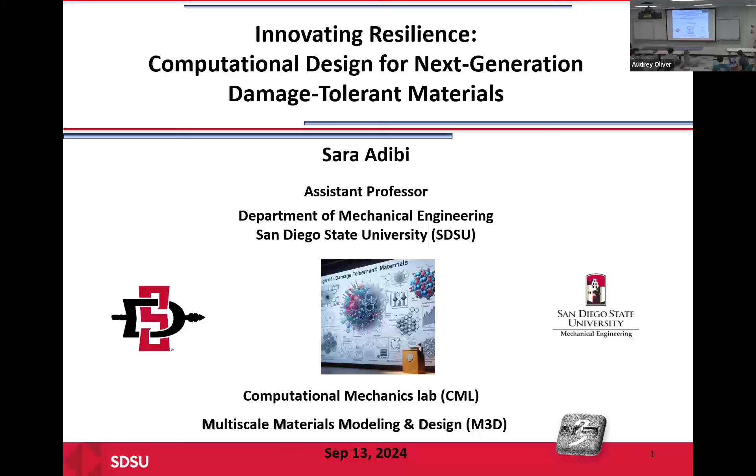I'm going to talk today about some of my research in the computational mechanics lab, in the area of multi-scale material modeling and design. Specifically, I'm going to talk about computational design for the next generation of damage-tolerant materials.

He has already introduced me, but just as a slide, I did my bachelor's and master's in Isfahan University of Technology in my home country, and I received a scholarship and moved to Singapore, where I did my PhD at National University of Singapore in collaboration with the Institute of High Performance Computing.

Then I moved to the US, and did my first postdoc at University of Houston in the Department of Civil Engineering. Then I moved to UT San Antonio, where I did my second postdoc in the Center for Non-Equilibrium Phenomena, and from there our group moved to University of Texas at Austin, and from there to Texas A&M University. I was in 3 places in Texas.

After that, I got a research faculty position and moved to the Center for Advanced Vehicular Systems at a very small city named Starkville at Mississippi State University. After that, I moved to San Diego 2 years ago, and right now I'm an assistant professor in the Mechanical Engineering Department at San Diego State University.

As I've told you, my research is mostly in computational mechanics. Let's see how computational mechanics has changed engineering design over the century.

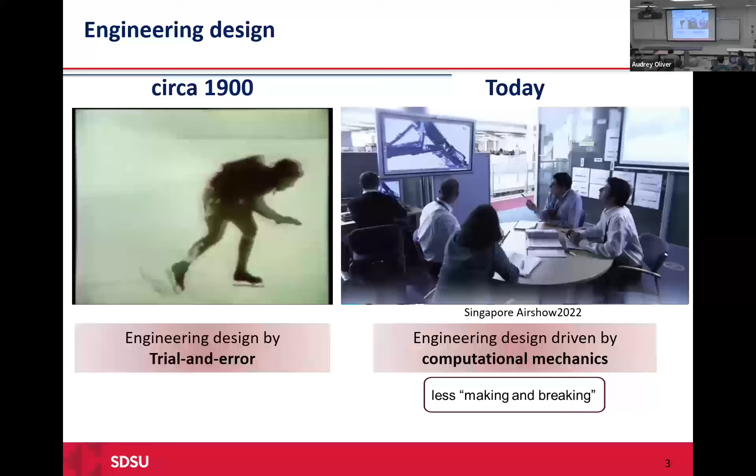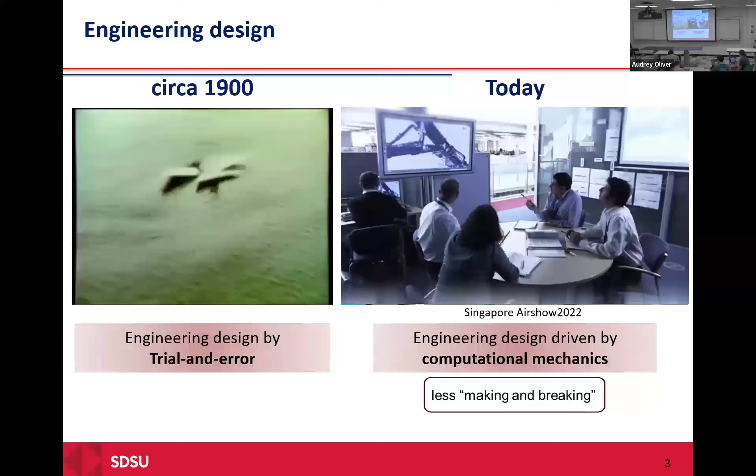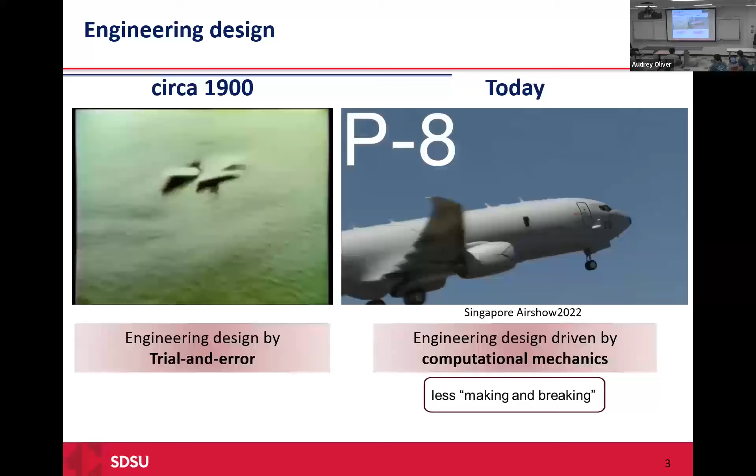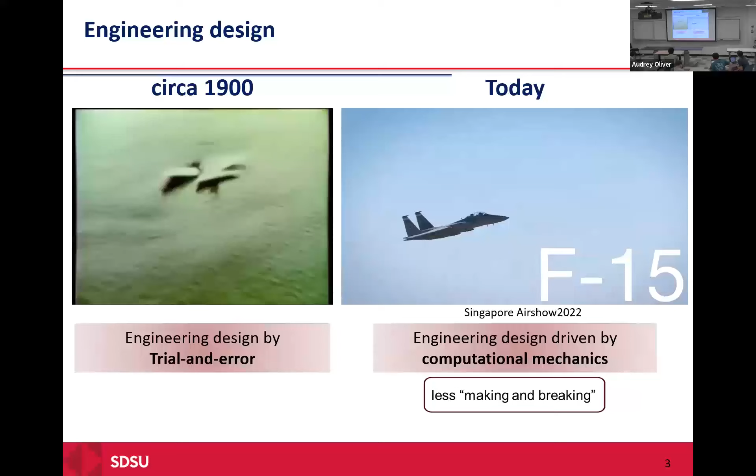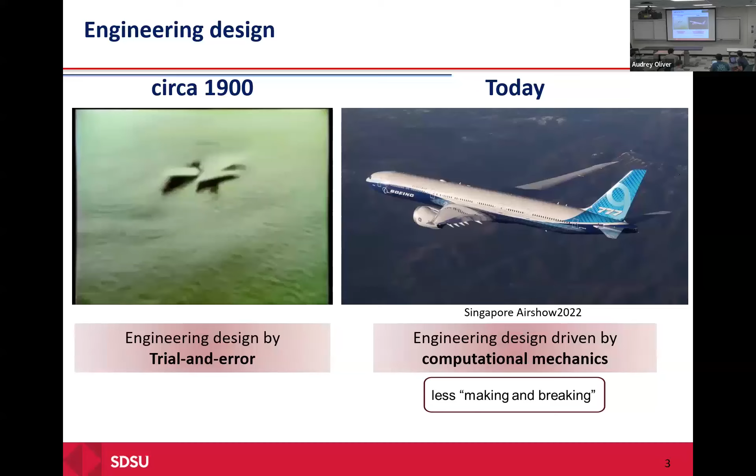This is just to show you how computational mechanics can revolutionize the area of engineering design. Hopefully in the future, computational power, data science, and machine learning can help us design and optimize through all the relevant lengths and time scales, and come up with multi-scale models that are more robust and higher fidelity. Advances in manufacturing and material processing can also help us in different sectors with new materials that may pave the way for zero carbon emission by 2050, which is the aim, especially for California.

Most of these computational mechanics applications are used especially in areas with extreme conditions. Extreme condition is something I'm mostly dealing with, it's one of the grand challenges for engineering explained by the National Academy of Engineering. They are applied in different sectors, for example renewable energy, aerospace, defense, and also advanced manufacturing or even medicine.

In all these sectors, usually we are dealing with an extreme environment, which can involve challenging experiments or complex physics that comes from high pressure, high temperature, or very high strain rate loading. It's difficult to do those experiments, and computational mechanics can be of great help.

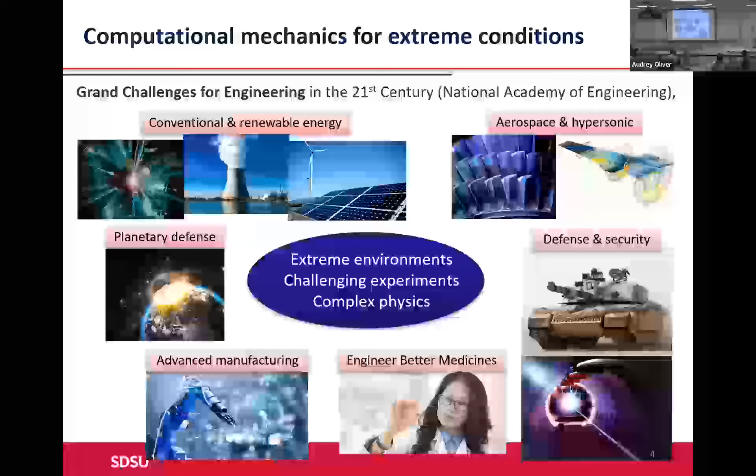My research interest is mostly in data-driven and physics-based multi-scale material modeling. Basically, I'm trying to model material behavior and come up with design, discovery, or processing of newer advanced materials—for example, designing materials that can be damage tolerant.

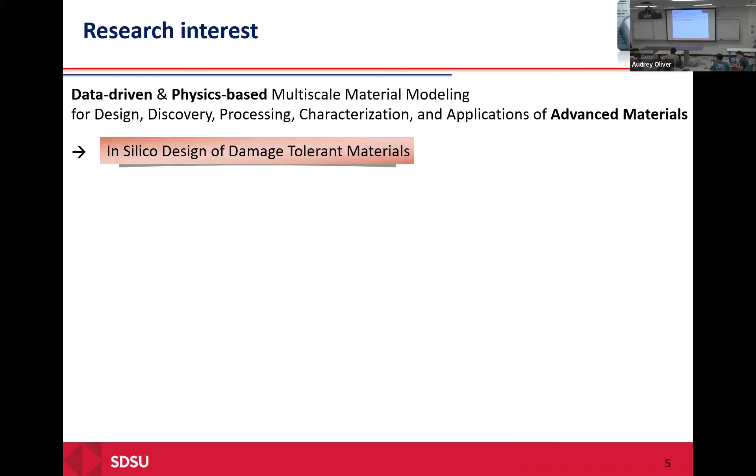This initiative comes from the Materials Genome Initiative, which was launched about a decade ago. The aim behind it is to come up with discovery and deployment or manufacturing of materials with faster speed and cheaper cost, which can be used in different sectors like clean energy, human welfare, and national security—helping to improve the quality of life.

To summarize, for any multi-scale material modeling in these sectors and applications I've discussed, we are dealing with different time scales. We can get data and models from these different time and length scales, and come up with a multi-scale model that can predict material behavior or design a material with desired properties.

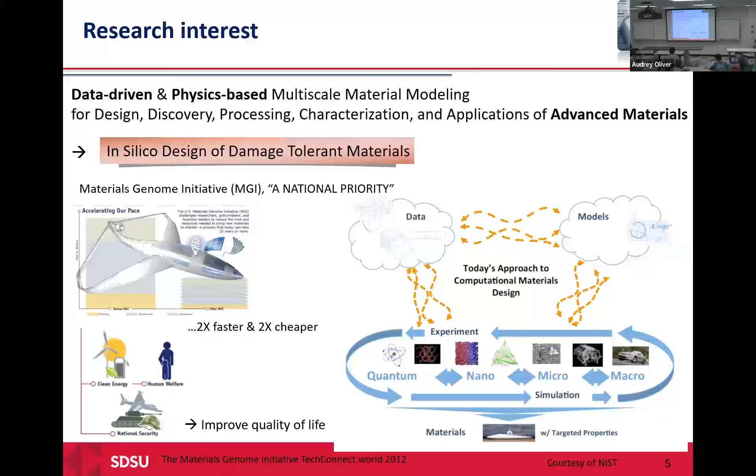Talking about these different time and length scales—usually in computational mechanics, when we talk about multi-scale material modeling, we are dealing with different length and time scales, and we have different methods that can be used for each different scale.

For example, when we talk about electrons and their reactions, we have ab initio and quantum mechanics. When we talk about the interaction of atoms, it could be atomistic or molecular dynamic simulation. Going to a much higher length scale, like continuum-based or macro scale, it would be finite element modeling, mesoscale modeling, or continuum mechanics. At the end, having all that information, machine learning and data science will help us optimize the model we have.

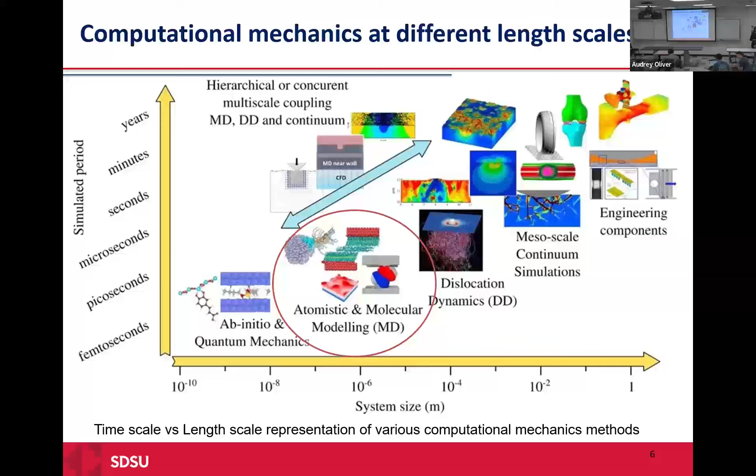Today I'm going to talk about the atomistic simulation, one of the methods in multi-scale modeling. I'll briefly explain what the simulation is, since you're from different backgrounds and maybe not all aware of this type of modeling. Then I'll bring two examples that help predict the failure of material using MD simulation—one about spall failure, and the other about designing nanoengineered metallic glass or nanoglass material.

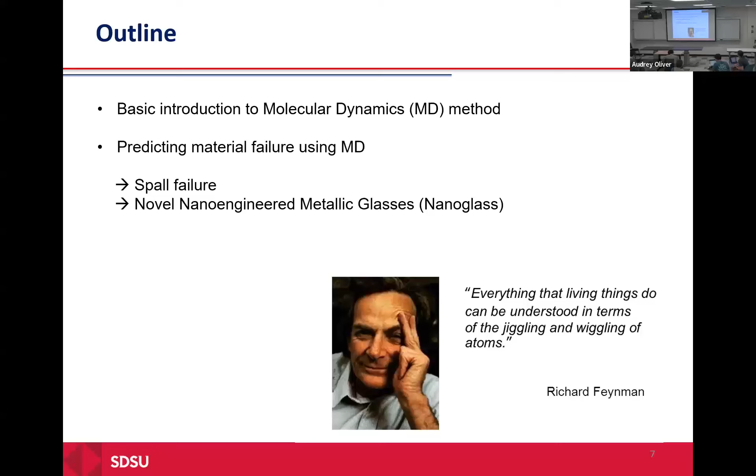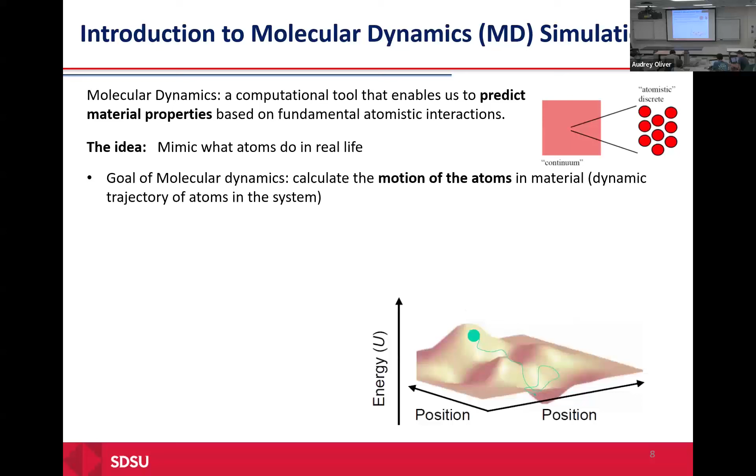Some introduction about MD simulation, or molecular dynamic simulation: it's basically a tool that helps us predict material properties based on the interaction of very fundamental atomic interactions. The idea is to mimic, through simulation, what atoms are doing in the real world—to find the trajectory of an atom under any environment or loading situation applied to the material.

We have two basic things in this simulation. Usually we deal with an energy function that lets us see the force experienced by the atoms based on their position. Using that energy function, we can apply Newton's law to see the effect of the motion of the atoms.

Consider a system of n atoms—n particles, each with mass m, an initial configuration, initial position, and initial velocity. We can form an interatomic energy that predicts the energy of these atoms in the system at a given spatial position. These atoms apply force to each other, equal and opposite, based on the physics we know.

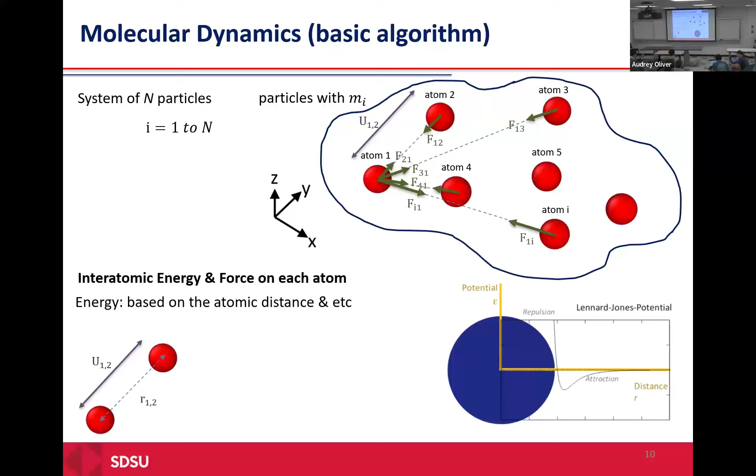This force can be related to the distance between atoms in space. If they are too close to each other, they push each other away; if they are far apart, they attract each other. Based on this distance or coordinate of the atoms, we can define an energy function for the system, and from that energy we can get the derivative, which gives us the force.

If you have the force that this system's atoms are applying to each other, then by Newton's second law, we can get the acceleration. From the acceleration, you can get the velocity, and from the velocity, you can get the position of the atom. Basically, we have a system of equations, second order differential equations, that can give us the position of the atom at each time step.

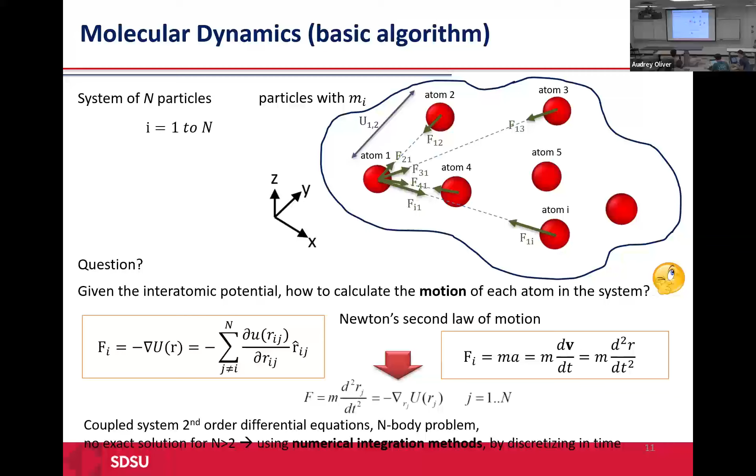As a computational scientist, you know different numerical integration methods that can solve this type of equation. Basically, in the computational method, you divide your system into different time steps. Each time step, you see the position and velocity of the atoms, and then you get the energy. Based on the energy, the derivative of energy, you get the force, and from force, you have acceleration. Then by numerical integration, you can have the position of the atom at the next time step.

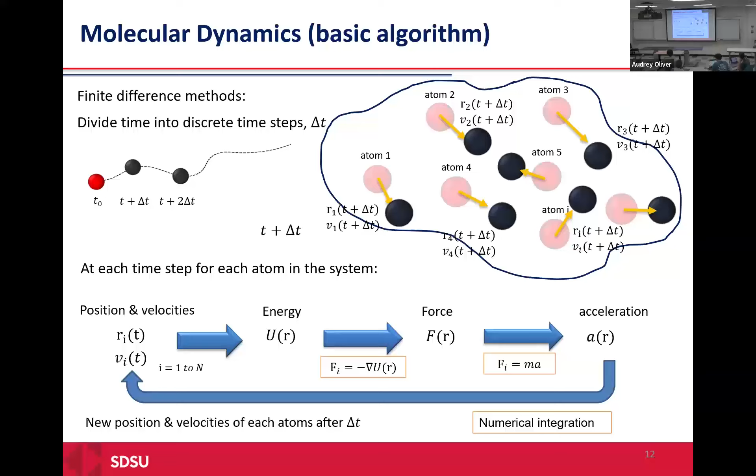If you follow this, after t seconds you have the final position of your atoms. Then you can use different types of numerical integrations. This is the flow chart I've already mentioned: getting the position, velocity and force, and from that having the next velocity and position of the atom. One of the methods is using the Euler method, or any type of method, writing the velocity and next velocity of the atoms, and instead of the derivative of velocity, you get acceleration, which comes from the force, and the same for the position.

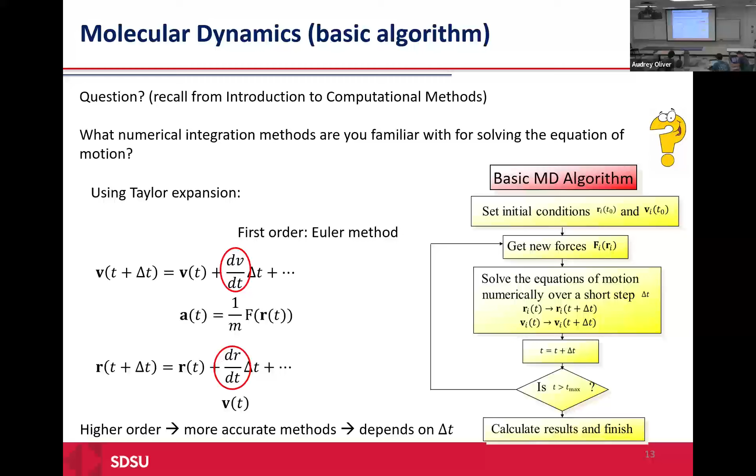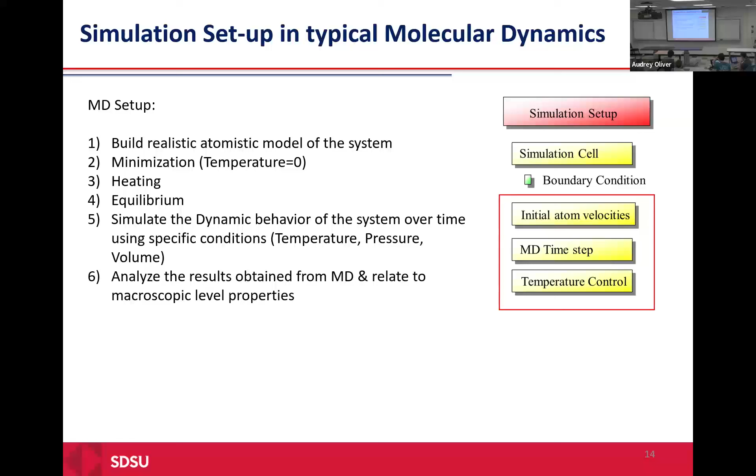The basic idea behind all these simulations and setups is the same flowchart I've already explained: getting the position of atoms, velocity, acceleration, and from the force, back to the energy of the atom. The things we usually do in the setup are feeding the initial structure of the atom, minimizing to get to the lower energy state, and then applying any type of thermodynamic procedure you want - to heat your system, apply some load, or adjust temperature, pressure or volume - and then get your result after some steps, and then another.

One of the software packages that has been used widely for this simulation is LAMMPS, which is open source, has been generated by Sandia National Laboratory, and can predict and develop the material in a good range.

Okay, I've already summarized what the simulation is.

Is there any way to do something like this to solve systems like a compact finite difference scheme for solving PDEs and such? Sorry, would you please repeat the question? Is there any way to solve them like this, about the algorithm - is there any algorithm like this compact finite difference algorithm solver for PDEs? I think that would be a good question to discuss with the professor after the lecture.

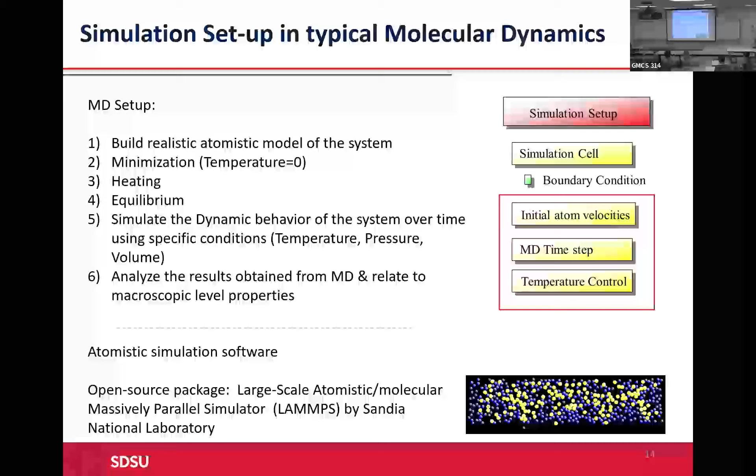Okay, I just summarized what we had about MD simulation. The next step is bringing some examples about using this MD simulation for design of material. One of the examples is talking about spall failure and the design for armor. The question is, for example, what do you consider when you want to design an armor? What is the criteria that is important?

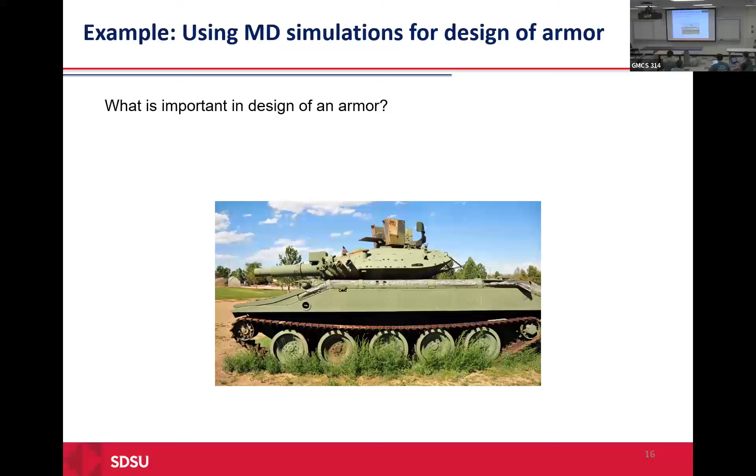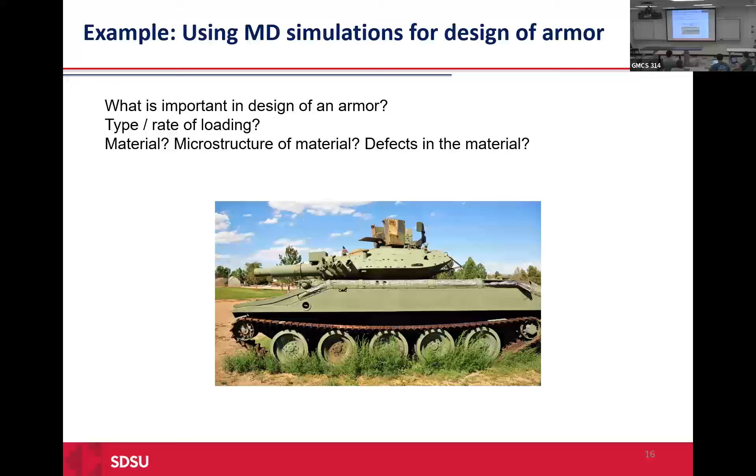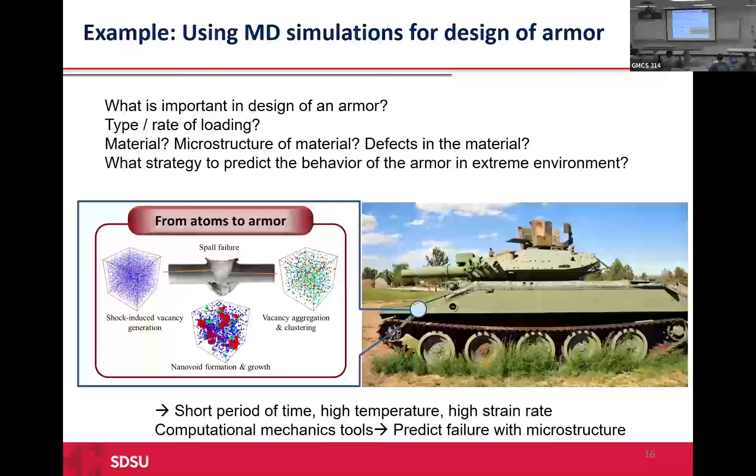Since it's an armor, we are dealing with the high strain rate of loading and impact, or different rates of loading. The material and microstructure of the material is really important, as is the defect we are generating in the material. One strategy is to look at the microstructure and see what is happening when we are dealing with this high rate of loading, or for example this impact that's happening for armor or different defense applications. As I have mentioned, we are trying to use proper MD simulation to predict this failure mechanism that is happening during impact.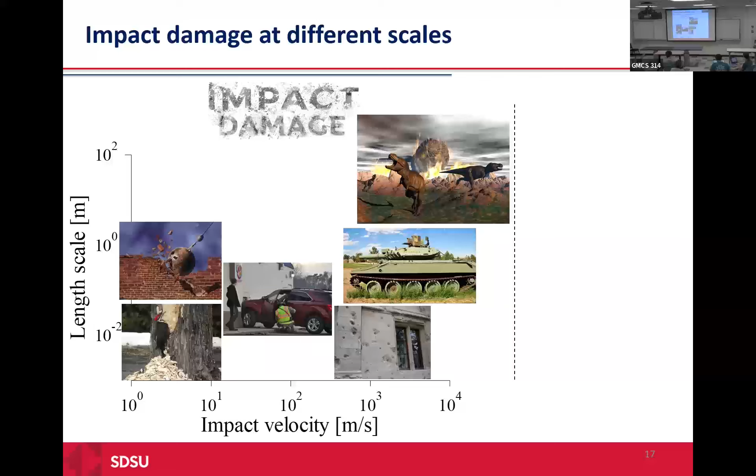In all these scenarios, we are dealing with an impact that transfers energy. Just to dissipate the energy, the material will go through different microstructure changes. Different scenarios will happen - for example we might have a crack or fragmentation in the material, we might have a spall failure, or the energy might be so high that it goes above the melting temperature and causes a phase transformation in the material.

Now we want to look at the spall failure. Here is one of the samples sent by the European Space Agency, showing space debris hitting an aluminum plate - a small sphere hitting the aluminum plate. If the plate can avoid penetration of the bullet, it cannot avoid the effect of wave propagation. Those waves travel through the plate, and at some point they cause failure in the material that can be seen here, which we call spall failure.

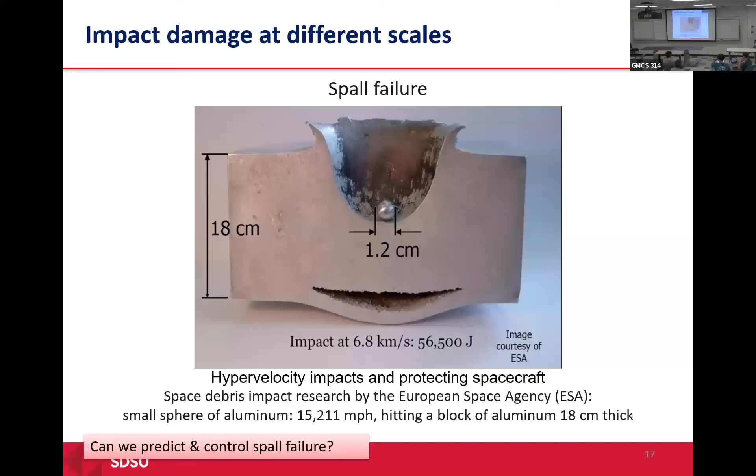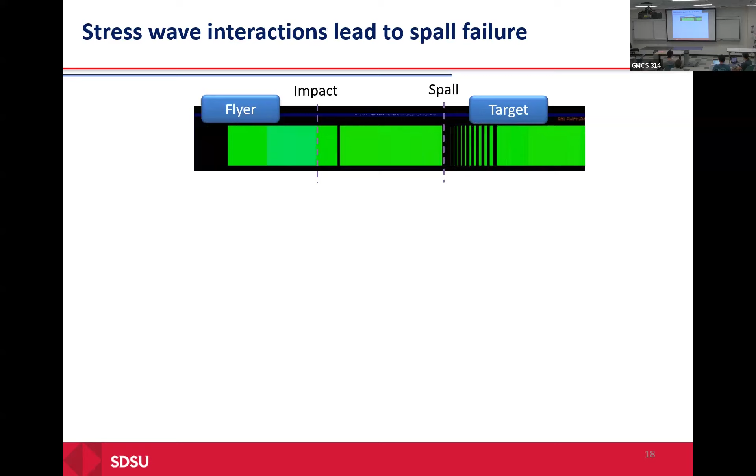We want to see how we can predict or control this spall failure. This shows, for example, the impact of a flyer hitting a target. At the place of impact, waves propagate, and when they come back as a tensile wave, they hit another place where the spall happens. If we look at the microstructure of the material and the experimental data we have - this is a sample of high purity single crystal aluminum - we see some dimples at the place where the spall is happening.

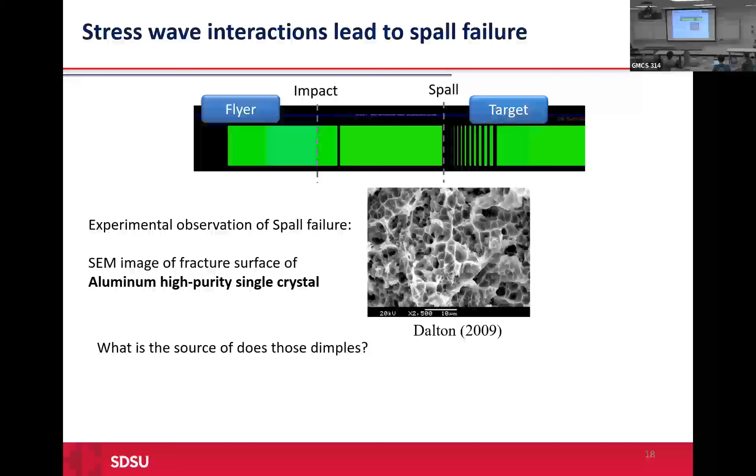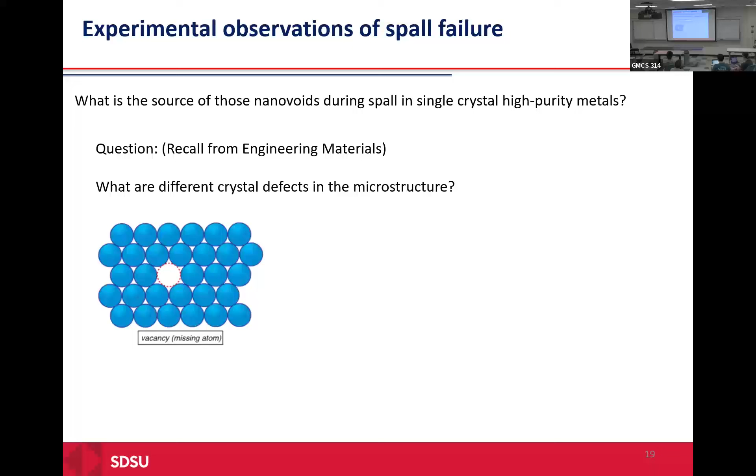We want to see what is the source of these dimples at the place where the spall is happening. If you remember from engineering materials, we have different types of defects in the microstructure. One of these is vacancies, where we lose one or some atoms in the microstructure of the material.

It has been seen that for this whole process, when we have those high intensity shocks - usually produced at the place where we have damage - they produce a high percentage of vacancies in the material.

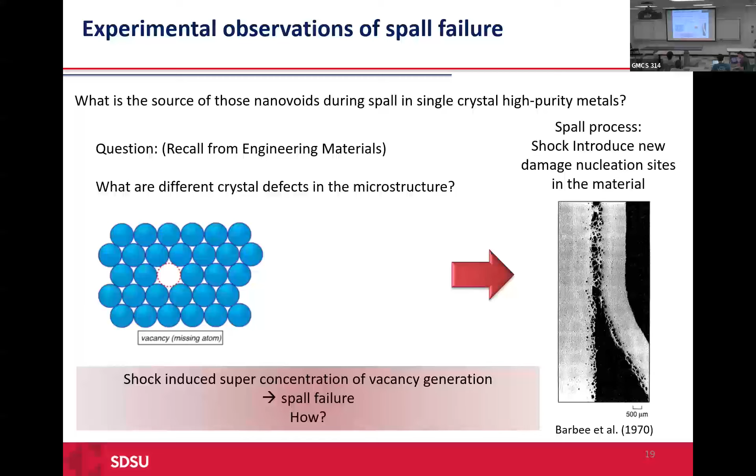This shock loading induces a super concentration of vacancies, which can finally lead to the spall failure. One hypothesis is that this shock loading can generate a super concentration of vacancies. Those vacancies cluster together and form a larger cluster, like a nano-void formation, which becomes a place for nucleation of the fracture and the occurrence of spall.

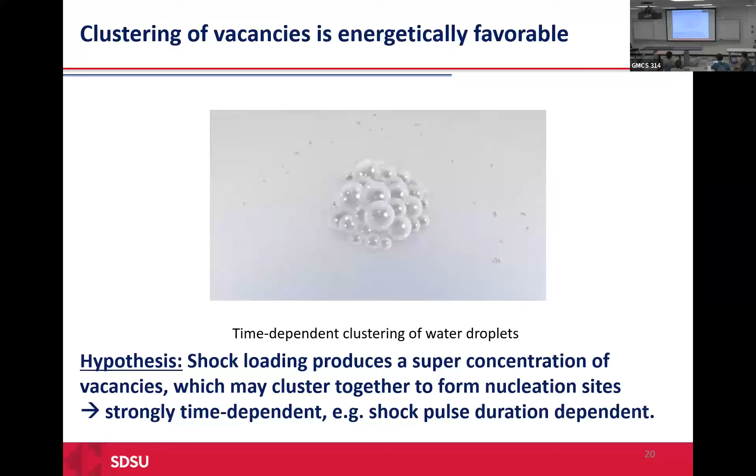This phenomenon is highly dependent on time and also on the temperature we are applying. The temperature can make this diffusion faster, and time also makes it easier to create a larger formation.

Then we can apply loading on the sample at different time steps to see how the larger cluster size affects the strength of the material, or how this microstructure forming after shock loading affects the material properties.

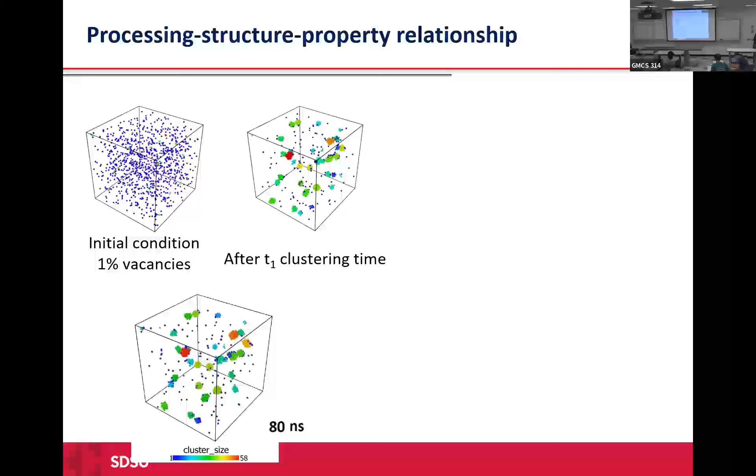Just to visualize the process: we started with the initial condition by removing 1% of vacancies and giving the structure time to evolve, and we can see those vacancies clustering together. At each time step, we apply hydrostatic loading to the sample.

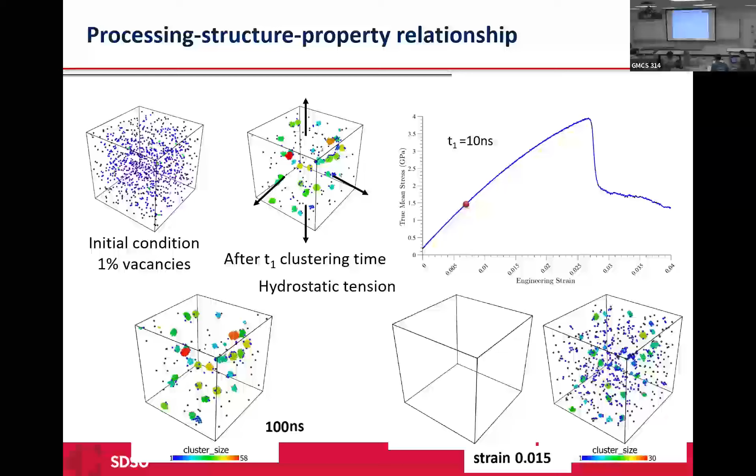Then we draw a stress-strain curve for the material to see how it would fare and what the spall strength is, which is the maximum stress through the simulation. We did this modeling for different time steps, and at each step got the microstructure, applied hydrostatic load, and obtained the stress-strain curve from the simulation, running from 0 to 100 to 500 nanoseconds.

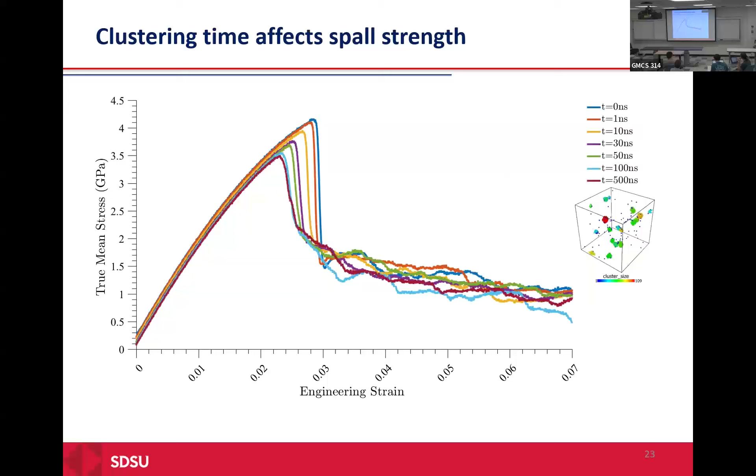We extracted the spall strength, or maximum stress, from that data, and we can see that the strength decreases as we increase the clustering time. This shows that increasing clustering time gives a larger cluster size, which can decrease the strength of the material.

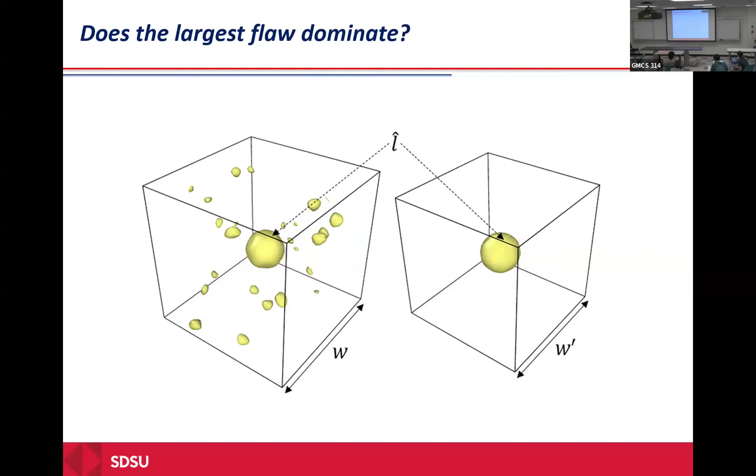We wanted to see if we could model this scenario with just a larger cluster size, without the full distribution of clusters, and still predict the material behavior. To compare, we set up a system with the distribution of vacancies and another with just a larger single cluster size, then applied loading to both.

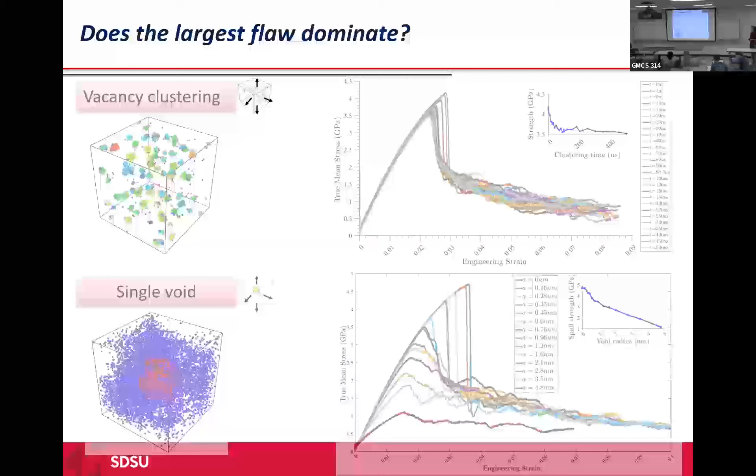This is the first one with vacancy clustering, and the second is just a single void with the same size as the larger cluster. We got the stress-strain data for both and plotted them on the same curve, and they match fairly well.

In most areas they match well, which is useful if we want to build a model based on the larger cluster size.

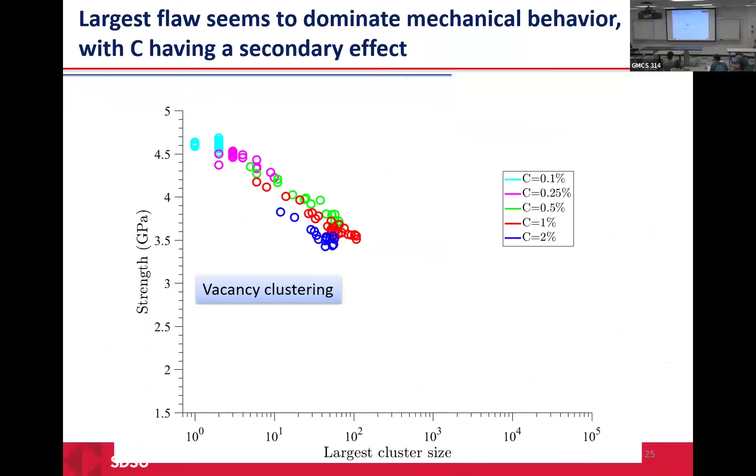There is good agreement between the continuum model and the MD simulation data, except for the very small cluster size. If we give enough time to the clustering process, it produces the same data we already have.

The next step we're doing is changing this part of the continuum model. Does the clustering process require the material to be highly stressed? If we apply stress, of course it will happen faster.

To observe something at this scale and time scale, we apply force, which is similar to what happens under shock stress, where the material is under stress. A material that is unstressed might still undergo this, but it would take years, or it might not happen at all, or just take a long time. It also depends on the temperature.

One more question: don't these impacts induce uniaxial stresses rather than hydrostatic ones? It's more uniaxial if we're talking about this type of impact, but here we wanted to have a model to look at it.

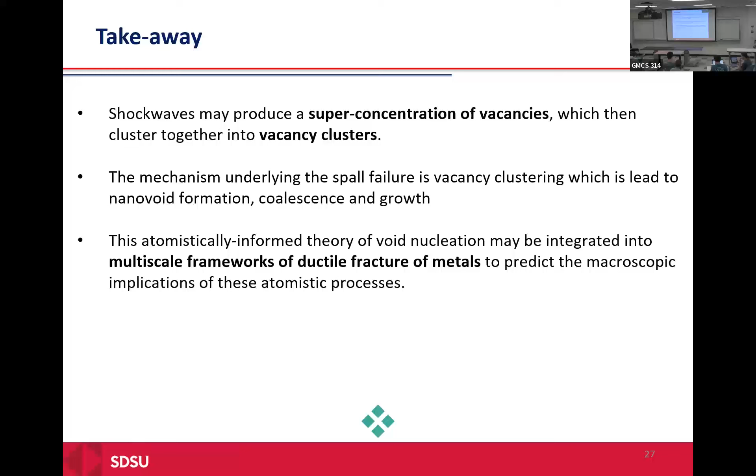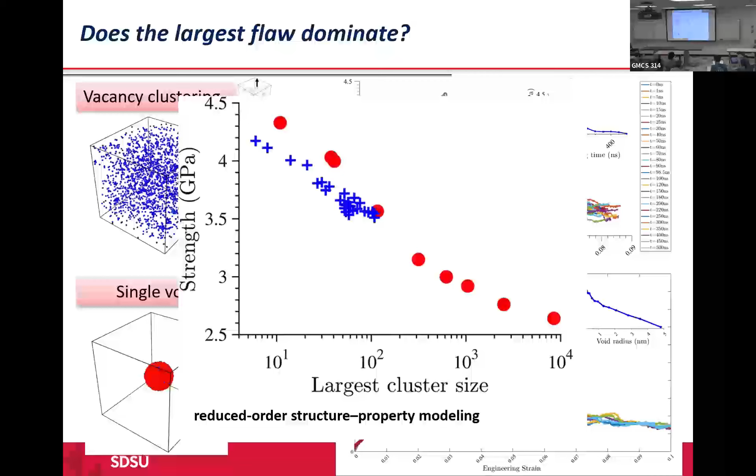So the first question is, when you are propagating a shock wave in a uniaxial state of strain, you are generating a hydrostatic stress, so your results can be interpreted in that sense. But I noticed that the results you're getting are still far away from the intrinsic strength of aluminum. If you calculate the intrinsic strength of aluminum, even accounting for clusters, you're getting way below that. So you're getting 4 GPa, right?

And we know it's a lot more than that, like E over 3. So if you take the modulus of aluminum and divide by 3, you're getting a lot more than that. So where's that dichotomy between the number you're predicting and the intrinsic strength of the material? I think it's mostly because of the rate of loading we apply. Of course in MD simulation the rate of loading is very high, and we need to keep it high because of the computational resources we have. From MD, we can mostly get a trend, not an exact real number. Otherwise we'd need experiments run at this high loading rate, or we could decrease the rate. The accuracy of the result also depends a lot on the potential we are using, whether it can predict the properties close to the experimental data we have. Then we can get a better result.

I understand the point about the difference in loading, but when we talk about the intrinsic strength of the material, the intrinsic tensile strength, we're actually talking about a very, very fast loading, because that's the only way to suppress all plastic deformation and give rise to the intrinsic behavior. But anyway, I take the point about the loading, but that's where these graphs come in.

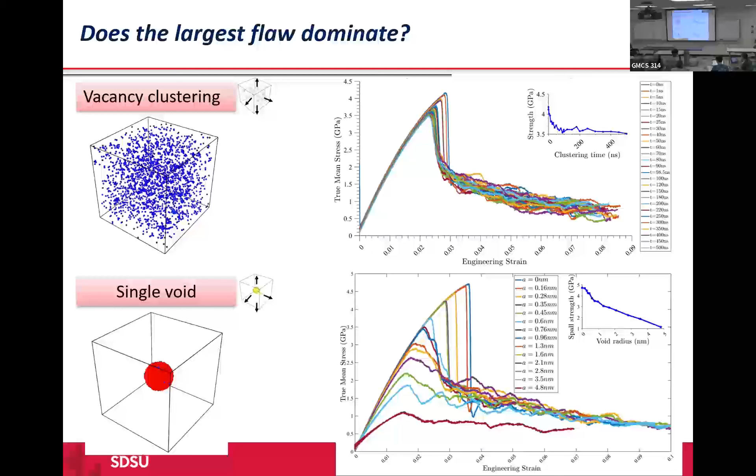The next example I want to show is about another type of material, which is metallic glass. These materials combine the properties of both metals and glass. The element is like a metallic material, and the microstructure is mostly like glass material - it's amorphous.

They were synthesized for the first time at California Institute of Technology by fast quenching of the molten alloy, for example at the rate of 10⁶ Kelvin per second. At that high speed, atoms usually don't have enough time to arrange themselves into a crystalline structure, so the final structure becomes amorphous.

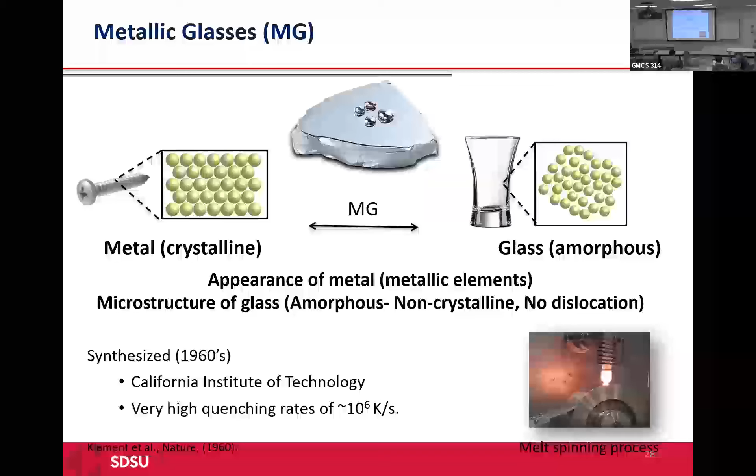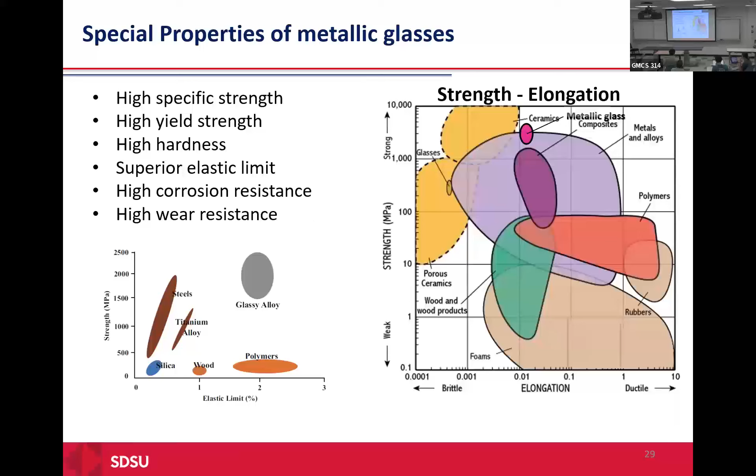Because of this amorphous structure, they usually have some special properties: very high specific strength, very high yield strength, high hardness, and a superior elastic limit - their elastic limit is very high. They also have a really good bouncing effect, high corrosion resistance, and high wear resistance.

Some applications we can consider: because they have a really good bouncing effect, consider if you drop your phone - it's made for that and bounces back, an ideal case. Because of the very good corrosion and wear resistance, they can be a good candidate for medical devices. Because of the very high elastic limit, they can be good for sporting goods. And because of their fine structure, they can be a good candidate for NASA applications, which has been used a while ago for different types of applications.

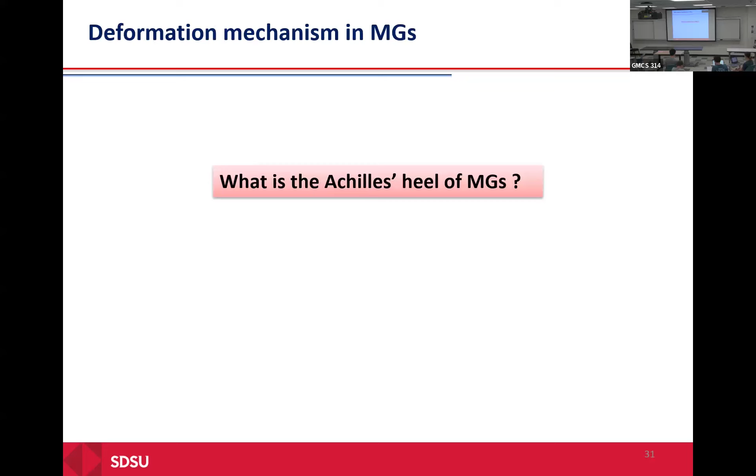But like other materials, when they have very good properties, usually they have some drawbacks as well. What is the Achilles heel of this type of material? They usually have a very dominant shear band formation that makes them really brittle.

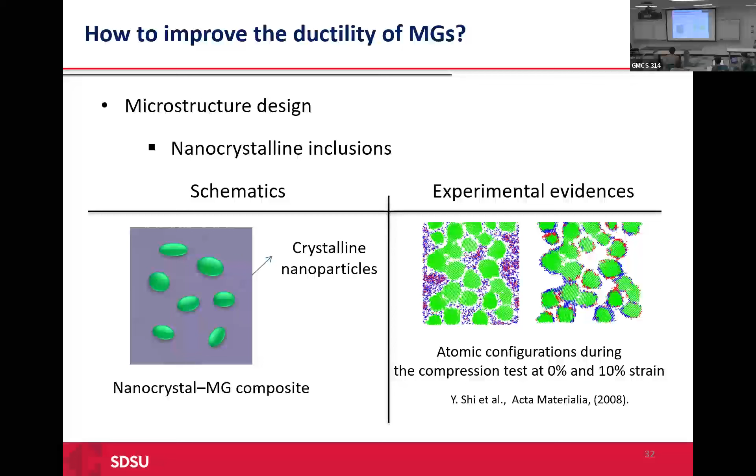One method is using nanocrystalline inclusions - putting in another type of element that can serve as a source for the nucleation of shear bands, which distributes the shear band formation and gives more plasticity to the material. Another method is doing plastic deformation and cold work just to distribute this shear band formation.

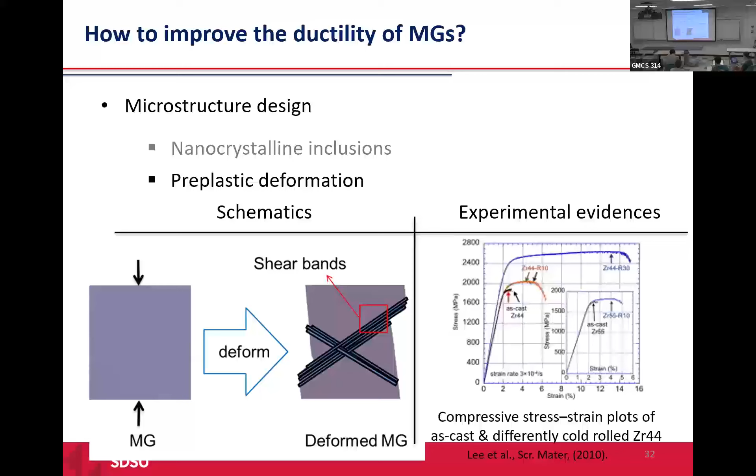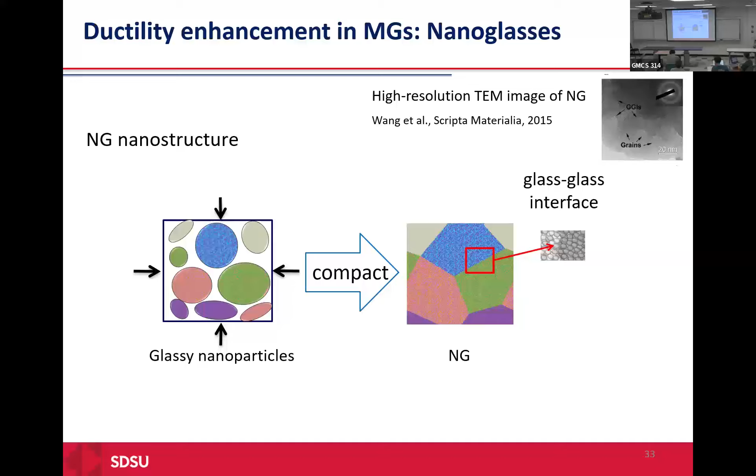Another approach I'm going to discuss is forming nanoglass material. These nanoglass materials are made by the consolidation of glassy grains - small glassy grains that we compact together. The final microstructure has glassy grains separated by interfaces.

Nanoglass is something like nanocrystalline material. The difference is that for nanocrystalline material, we have grains with different crystalline structure, separated by grain boundaries. But in nanoglass material, the grains are already amorphous and are separated by interfaces, though the properties of the interface differ from the grain itself.

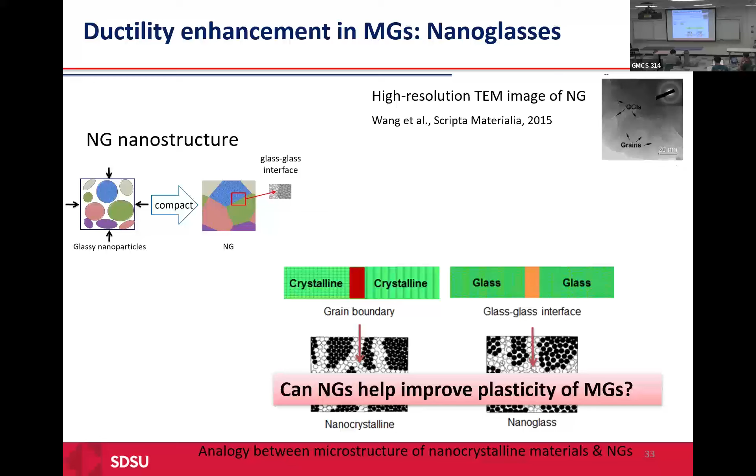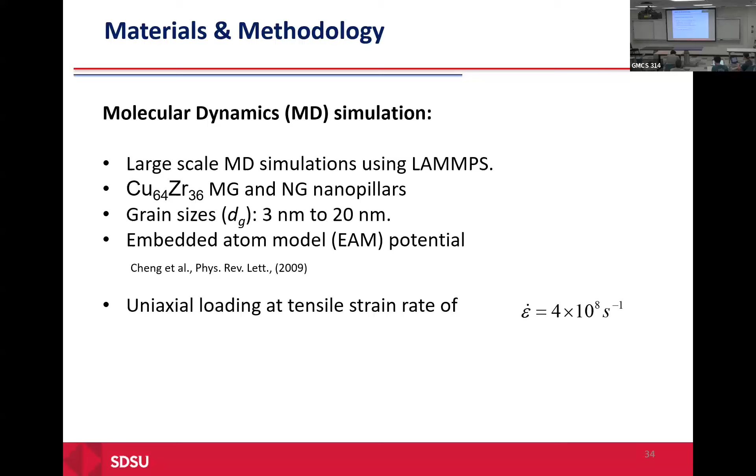Now we want to see if this nanoglass microstructure can really improve the plasticity of metallic glass material. We used simulation again, choosing copper zirconium structures and nanopillars of copper zirconium with different grain sizes. We started with crystalline copper zirconium, melted it to 2000 Kelvin, then fast quenched at a rate of 10 power 10.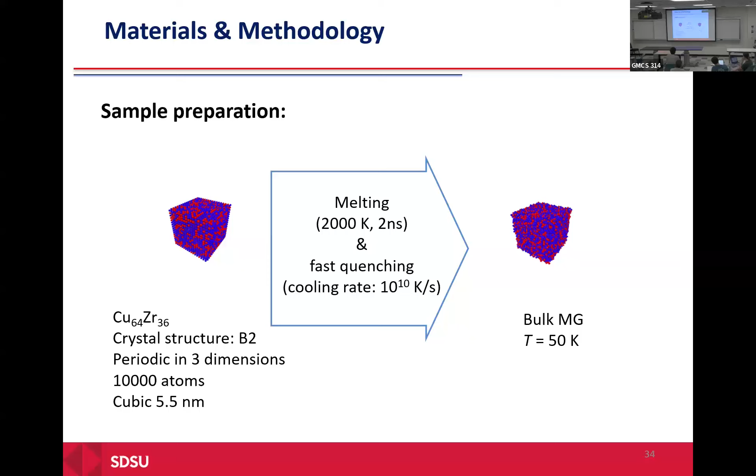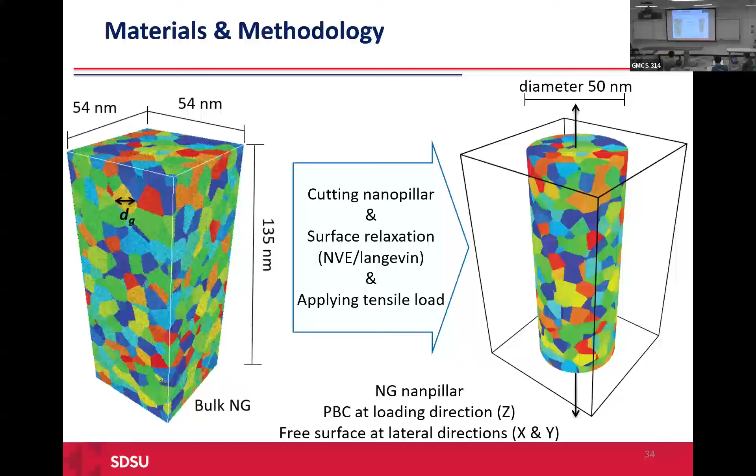We cut nanopillars from this nanoglass with different diameters, and applied uniaxial loading to the nanopillars to see how nanopillars with different grain sizes would deform under uniaxial loading.

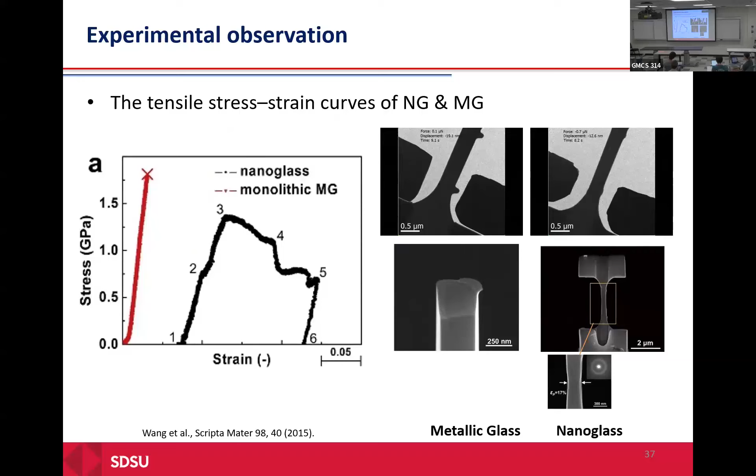One of the other ideas was to combine this metallic glass and nanoglass and make a composite of those, having different layers of metallic glass or different layers of nanoglass and metallic glass, just to work with the properties, to tune their strength and also their plasticity. These are some of the results we got with the metallic glass, the nanoglass, and layered metallic glass, trying to work with the strength and also the ductility of the material.

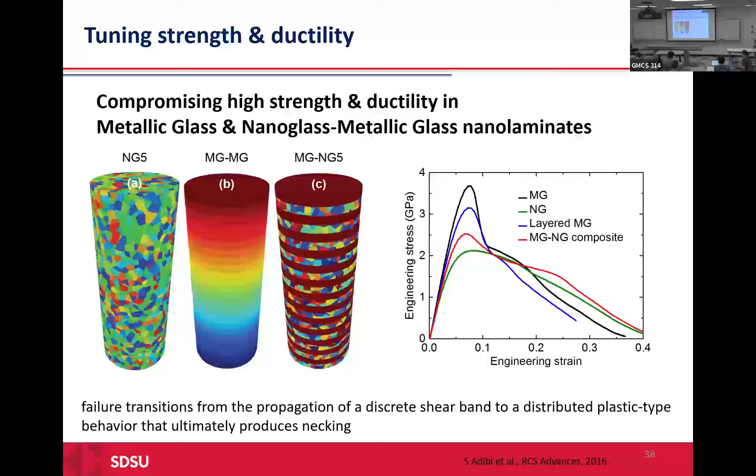Overall, going from metallic glass and changing the microstructure of the material to nanoglass, we could see a transition from the very localized plastic deformation to some plasticity and some type of necking.

The takeaway from this point is that by changing the microstructure and implementing some type of interface in the microstructure of the material, we could suppress the shear banding, a very dominant shear band formation, and we could transition to more homogeneous flow as the grain sizes change.

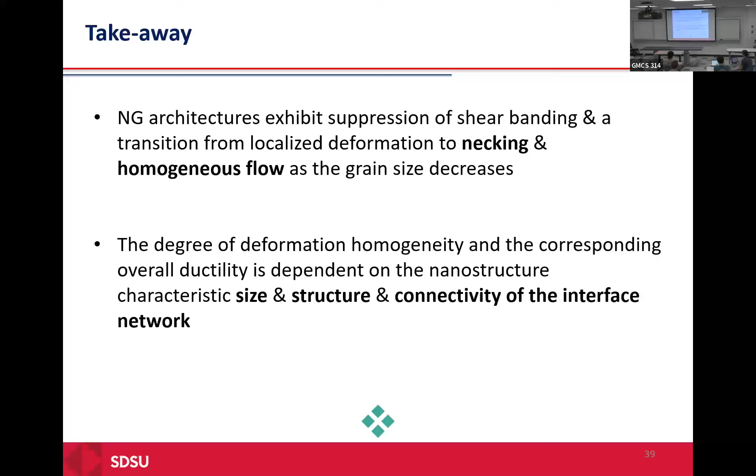By working on the grain size and the network of these grain boundaries, and by making a composite of those materials, it's possible to tune the behavior of the overall metallic glass and hopefully get some plasticity along with good strength of those materials.

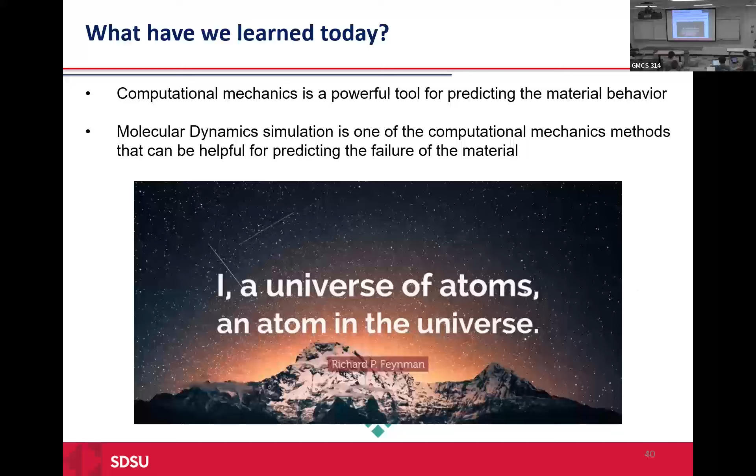This is just an overview of the things we are doing in the lab, different materials, and using this type of analytical and modeling approach to predict behavior.

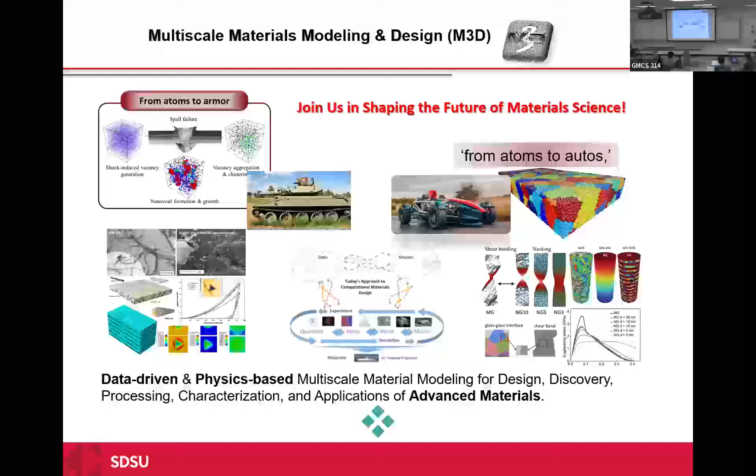If you have any questions, I would be happy to answer.

Not sure how this works, but I'm going to do it my way. So if you have a question, please raise your hand. Stand up, you have to field the question.

Thank you for the engaging talk, very interesting work. I can maybe start since I am moderating.

If you go back to your nanostructured glass, since you are calculating, are you seeing different flow mechanisms? Have you tried to probe the stress triaxiality to see the relationship between this uniaxial loading you're doing and how that changes the stress distribution or the stress transformation?

We did look at those things as well. I don't recall exactly, I don't have the result right now. We're looking at the microstructures, the free volume as well, how those things differ at the interface and also at the grain boundary. We did a small study on the stress triaxiality, but not a very intensive one, but that's a good idea. Other questions?

Yes, Professor. So for both parts of your talks, you've done a model. What are sources of uncertainties in both of these? Of course, they are just a model.

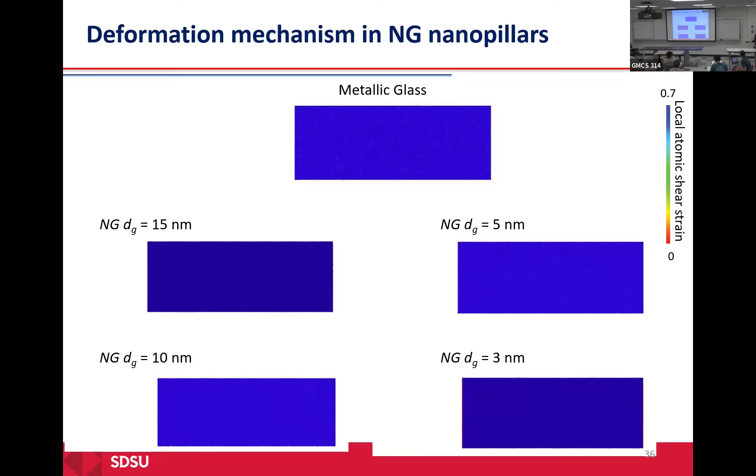I think there are so many things happening in the result. For example, as I mentioned, other types of modeling, the loading situation, the potential file that we're using—we idealize the system by the type of microstructure we've generated. There are different sources that make it not exactly as accurate as we want, but we wanted to get some idea about what's happening by changing the microstructure, and some idea about the predictive type of model.

Has there been any sensitivity analysis of your conclusions to those sources? Sure, that would be a good plan to do. I haven't started, but it would be a really nice idea to start.

How representative is your model of the crystal structure of the materials, or the distribution? So when you select the size to be 3 nanometers or 5 nanometers, how is that comparable to experimental—I mean the actual material?

It's really difficult to go to 3 nanometers, of course. Yes, as I said, if we really want to make a model comparable to the experimental one, we really need very good computational power and resources. 20 nanometers maybe is something we can compare, though it still depends. But of course, 3 and 5 nanometers is really small compared to what we have in experimental methods. These are some of the issues—the time and length scale are always an issue for the representation.

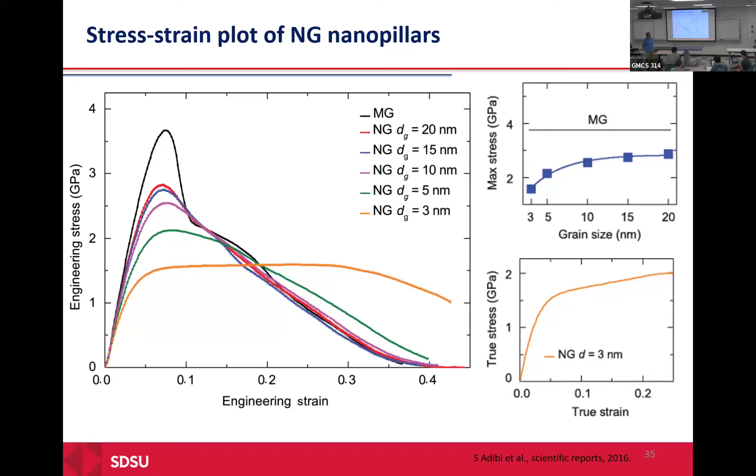When you introduced metallic glass, the way they formed it was quenching at really high rates. Given that you have to achieve that high rate of quenching, what is practically the size scale at which you can produce a part today? Can you produce a car axle at that scale, or are we talking about a much smaller scale that you can quench, or are there other methods? Right now, in experiments, they have nanopillars of metallic glass—they're doing experiments, maybe in nanotechnology, but they already have those sizes in place.

Because it can come from quenching, right? The quenching, when you go to heat transfer, becomes quenching time scales—if we get that high quenching rate on bigger ones. I think so, I'm not quite sure, but yeah, I think so. That's a good question about the scale of actual production.

They work on nano things. Yeah, I can— where's the technology at? It's good to do the simulation to know where we're getting to, then compare from the other end, from manufacturing.

You have to, because I always look at heat transfer as a diffusional process that's so slow. And even some of the things you showed with vacancy migration—it's a diffusion process and the rate seems slow. Usually they do melt-spin experiments, or they manufacture small artifacts—micro, nano scale. I think Khalid Morsi in chemical engineering came up with what's called ballistic manufacturing, but it's only for thin films, whiskers, things like that. So really, I don't think we're at the point where you can make larger scale parts.

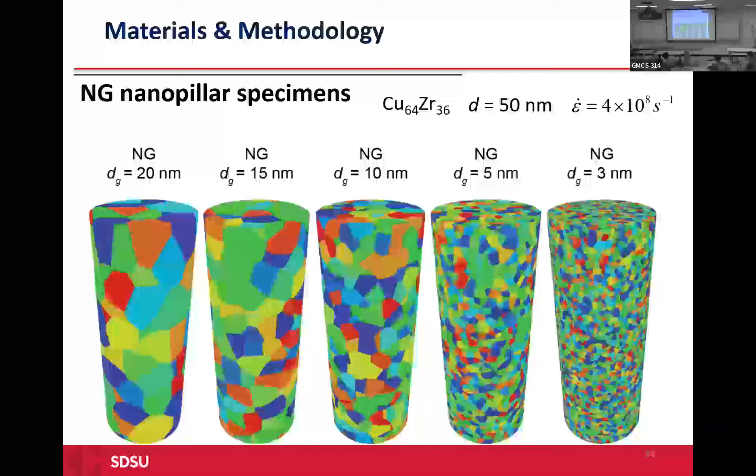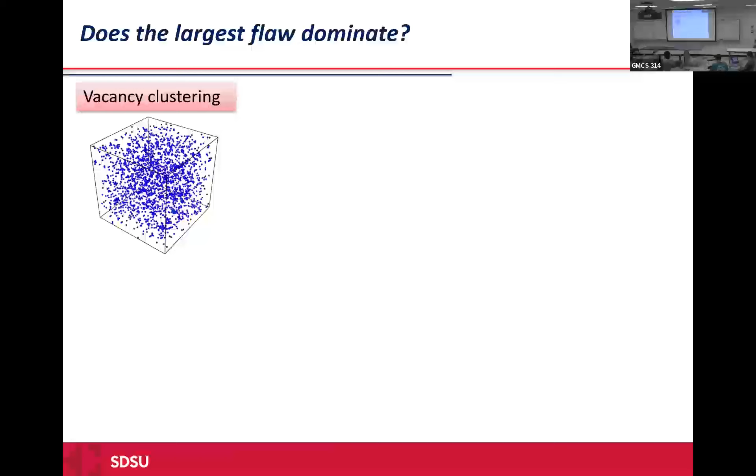Any other comments or questions? Yes, please. This is kind of just exploring conceptually, because I don't know if I missed it or just couldn't wrap my head around it. On the first part of your presentation, talking about the actual spall failure and the relationship to the vacancies or voids in those regions you had, what was the cause of that, or what was the relationship between the impact and those voids?

After having those shock waves through the material, usually those shock waves produce a super concentration of vacancies. If given enough time, at those shock loading temperatures and states of stress, they might cluster together and form something like nanovoids. There are a lot of mechanisms that will do that. So it's fair to say the loading induces a super concentration of vacancies and also the process of conglomeration.

Yes, the shock loading, the tensile part of shock loading. There are two things, and this is a very complicated topic. First, when you're propagating the shock wave, you have the compression phase, which is really propagating forward. That's where you create a very high hydrostatic state of stress, and that hydrostatic stress is what causes the voids to start to nucleate.

Now on the returning wave, it pulls that apart, and that's what causes spall to start to nucleate. If you have a very high state of tensile stress returning, you can actually take the whole chunk of material out. The depth of that will tell you the strength of the material and all these things. But one of the things we all neglect is talking about strain.